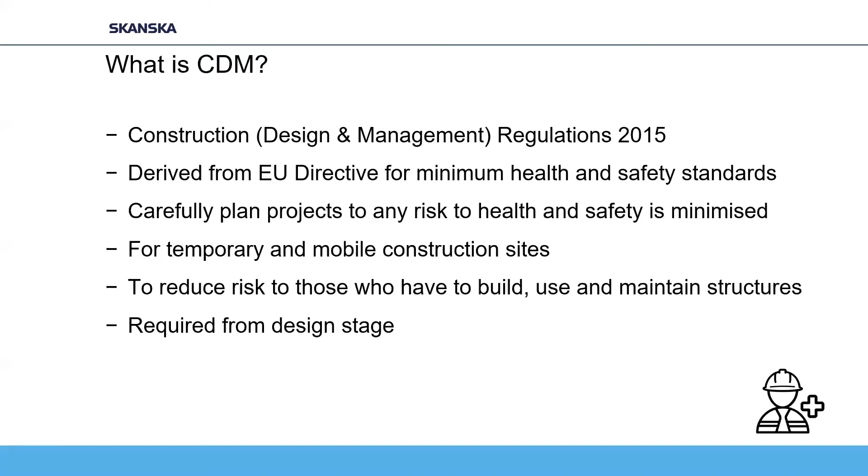So I just mentioned CDM here, I'll give you a very high level overview. CDM stands for Construction Design and Management Regulations, which were revised in 2015. They are derived from an EU directive for minimum health and safety standards, and they also have a minimum set of health and safety standards to adhere to. It's about the culture of carefully planning your projects to reduce any risk to health and safety. It's for absolutely all construction sites, so temporary works as well as mobile construction sites. And it's about all stakeholders, so it's to reduce the risk to those who have built or are using, but also maintaining the structures. It's not just about the construction, it's beyond that within the asset lifecycle. And the requirement is to have CDM in place from early or concept design.

Within the CDM regulations, just to note that CDM is the UK interpretation of this EU directive. So we have duty holders, or stakeholders if you like. Everyone who's involved in a construction project has legal duties under CDM. Those figures that I showed you at the beginning were very much about the breaches associated with that, because people weren't adhering to their legal duties.

So generally within construction, but also with CDM, you've got the duty holders: the client, the designer, principal contractor, contractor and worker. So absolutely everyone, and I think it just highlights how everyone has a responsibility in it. So generally the theme here is that all these duty holders must have the relevant skills, knowledge and experience necessary to fulfill the role in a manner that secures the health and safety of any person affected by the project, also including the general public.

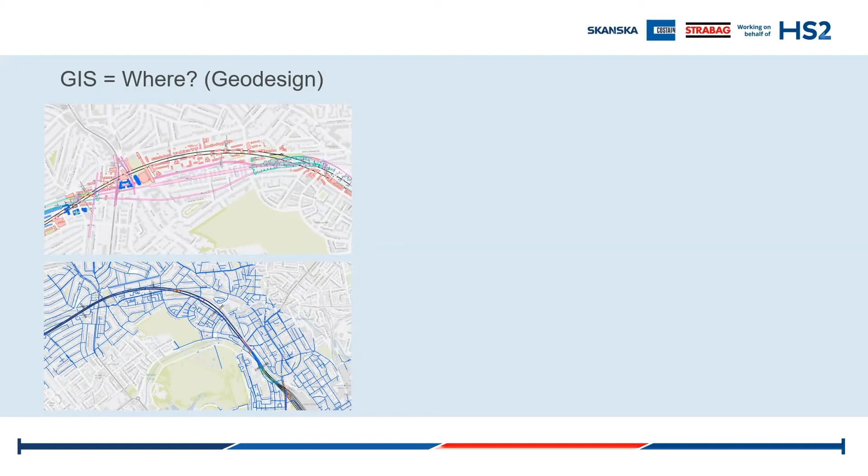So a quick overview of GIS and BIM. On one hand, we have GIS. Essentially, GIS addresses the question of where, and it has to do with how we understand, interpret, model, and analyze a particular element in relation to its surroundings. It's great in capturing conditions on the ground from a broader, larger geospatial perspective, and it enhances our geodesign.

On the other hand, we have BIM, Building Information Modeling, which is great in capturing the engineering detail of the asset we're trying to build, going to a level of detail that GIS is not capturing. When these two worlds work together, they empower each other, and we are lately seeing lots of efforts in the industry to bridge this gap. But at the moment there are significant data challenges, data interoperability challenges, and cultural challenges that block this, or at least require extra work to bridge this gap.

But once we are in a position of doing so, then we are going from what we see on our screen right now - isolated, separate domains - to a unified data structure, one that brings in BIM and GIS as a core source of information. This GIS and BIM is enhanced by surveying and data acquisition techniques, and it forms a very strong background that can be enhanced with additional information.

It can bring in logistics, utilities, environmental information, connect with live data sources and IoT, and in our particular case study, brings in health and safety information. This elevates the whole domain - firstly because we're able to visualize this information in 3 dimensions, which is massive compared to seeing health and safety risks associated with the terrain and surroundings in a 2D plane view.

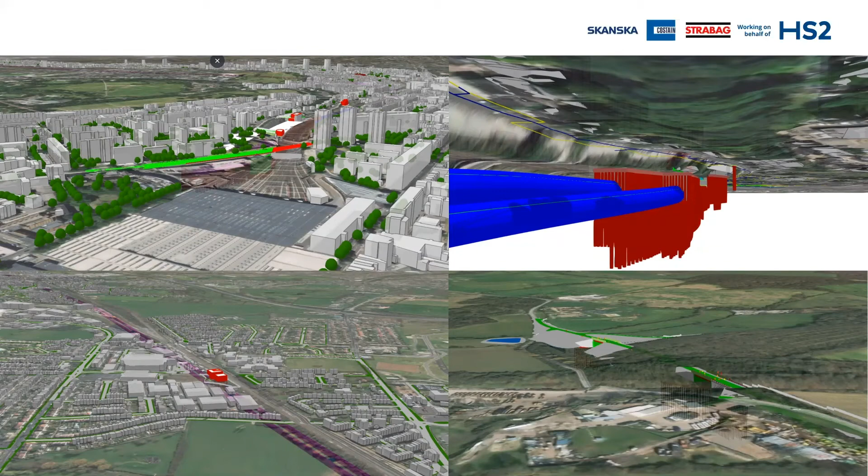Secondly, it's because we're able to bring in the surrounding information - we're able to bring in buildings, we're able to bring in the slope of the terrain that can actually help determine the hazardness of the risk you're trying to register. Before we go to our proof of concept, a few words about GeoBIM - essentially, it is a concept.

It's not a data type, and it's not a format or a software. As a concept, it is format agnostic. It can be used by anyone and everyone. However, it is very much data-oriented—it needs to be based on good, high-quality, standardized information. But also, it is people-oriented because it's being driven greatly by people and the requirements. Anita mentioned before that it is all about empowering the end user. And to do that, we need to make sure that what we are creating for the end user is relevant to their requirements.

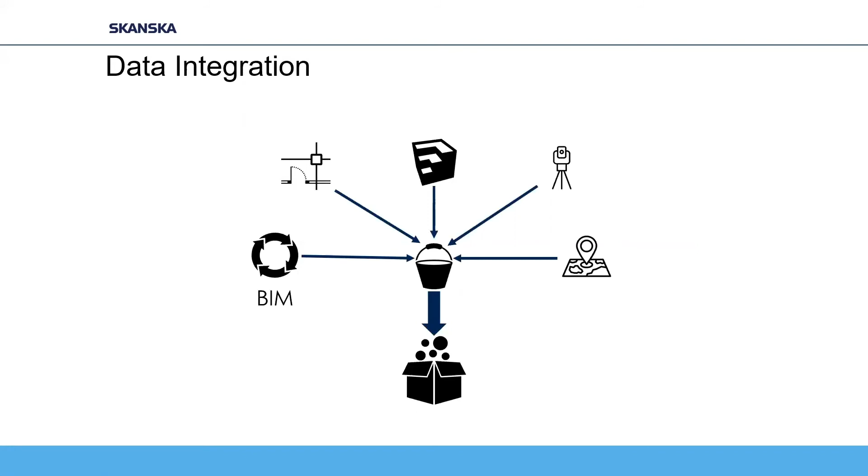GeoBIM falls under the sphere of data integration. What we have tried to do here in this proof of concept is take multiple different data sources. We have 3D models produced by BIM authoring tools, CAD information, architectural information, surveying, and GIS data. These are all blended in a magic bucket, if you like—the technical workflows we implement to address data interoperability challenges and create a unified output. We take this output and visualize it on ArcGIS Online, making it accessible to thousands of users who previously had limited or no access to different sources of information. That's one of the biggest strengths of data integration—it connects the people by connecting the data.

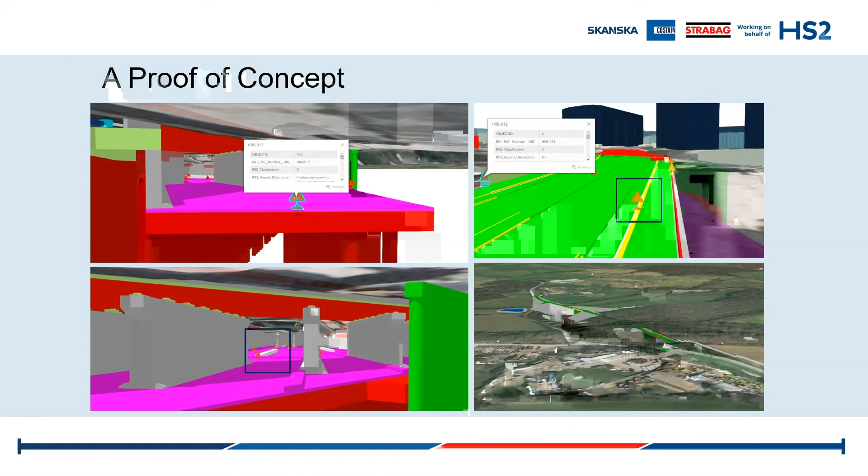Now I would like to discuss the proof of concept. We are in the very early stages of developing this solution for our project. At the moment, we have been able to bring GIS and BIM together at the technical level, and we have enhanced this with the visual representation of the CDM risk that Anita was presenting before. This lets us do two things: bring geospatial intelligence to the models and to the CDM risk register—because once you put it into a georeferenced system, the location is captured automatically and you can start making analysis. We are also one step closer to implementing the workflows and ensuring the data integrity that Anita mentioned, which has to do with how we capture, review, and exchange information among all the duty holders.

I hope that even from these images we can understand how impactful the visual representation in 3 dimensions is—having a GIS world, the surrounding context, the 3D models, what we are trying to build, and all the risks associated on site. This is a great tool not only to visualize information but also to inform all the stakeholders, all of our people going on site as part of health and safety briefing reviews—informing them in a visual way that is easily understood and adopted about all the potential risks that exist on site. And of course, these models are linked with relevant documentation stored on our non-graphical CDE.

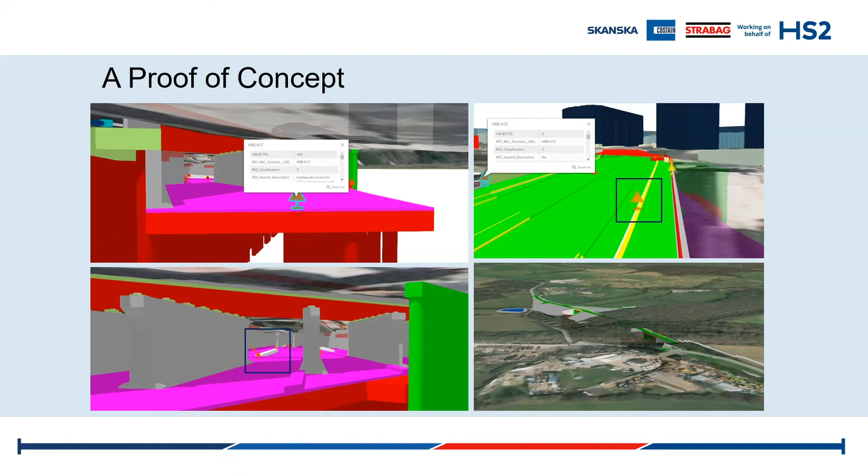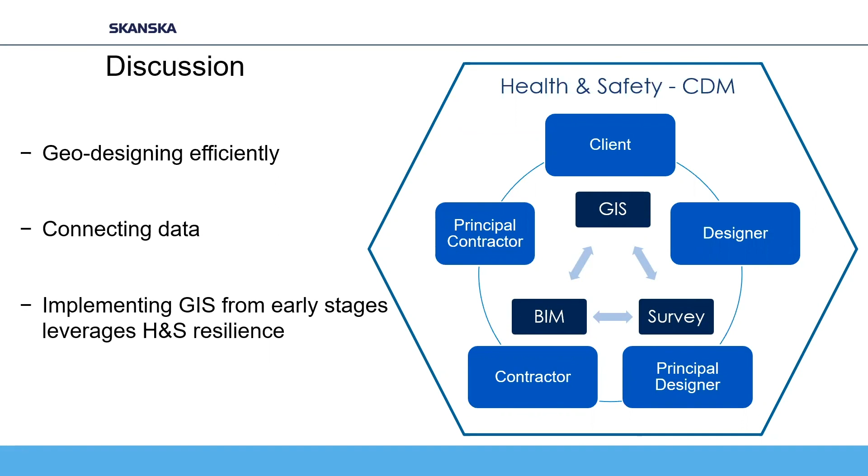In terms of discussion and future work, as I mentioned before, we have set up a strong foundation, a strong ecosystem. This is what GeoBIM is all about—we have GIS and BIM working hand in hand, empowering each other. Survey is an integral part of the process because it brings all the data in. Then we have the duty holders as described before by Anita: the client, the designer, the principal designer, the contractor, and the principal contractor. They are all able to work and collaborate from a single source of truth. Eventually what we are trying to achieve is to optimize the way we geodesign—working more efficiently and more collaboratively by connecting different data sources together. And of course, it's essential to implement GIS from the very early stages in order to leverage resilience in health and safety.

A few words looking forward, what we are looking to achieve—I think the field is vast for what we can do here. Once we combine GIS, BIM, and health and safety, we can start designing smart evacuation systems because we have the non-graphical information, the graphical information, and the geospatial intelligence from GIS. Further down the line, building indoor navigation tools to help our colleagues navigate underground, or general site navigation tools. And of course, the ultimate goal is to further optimize GIS and BIM and utilize both to have an efficient health and safety handover to the client.